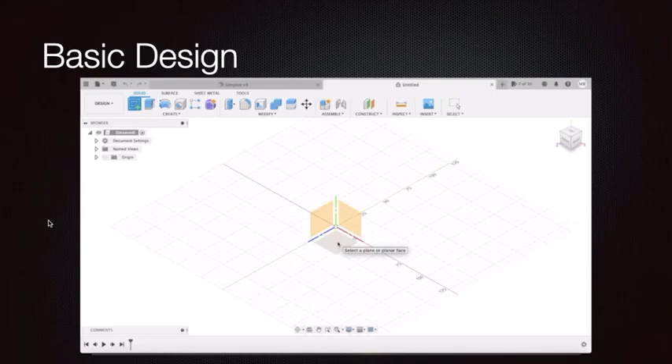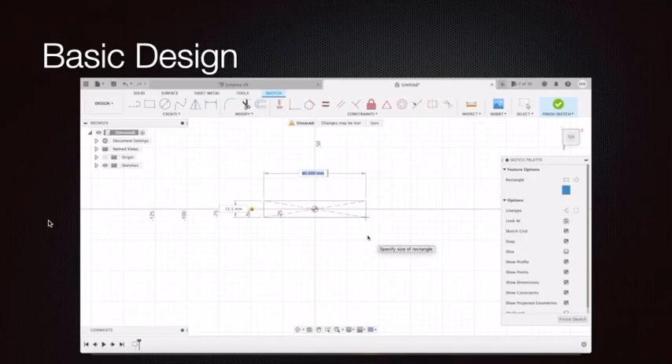First thing we have to do is create a sketch. This is one of the faces of the object, so I'm going to create a sketch on this plane and draw the base of the chassis, which is just a rectangle. I've selected the rectangle tool - in fact I'll select the centered rectangle tool and center it on the origin here of the plane, and make it 13.5 millimeters wide and 28 millimeters long. These are just made up dimensions for this example.

So that's our face. I'm going to click on finish sketch to say I've completed it, and there we are - we have a 2D sketch of a rectangle. Let's just zoom it up a bit so we can see a bit better.

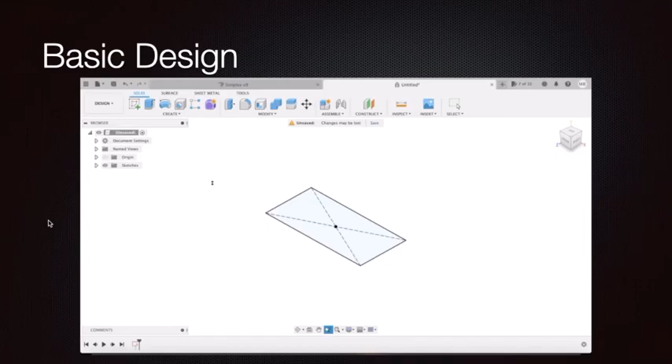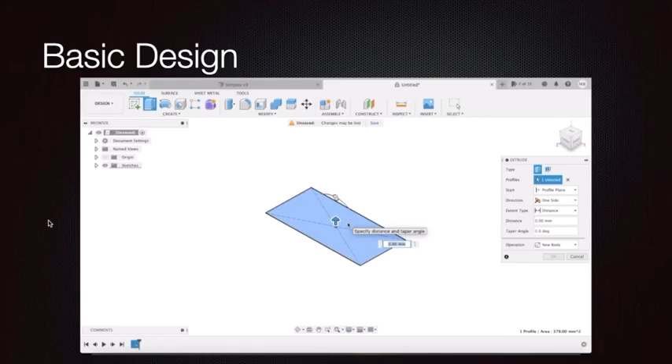Now I'm going to select the extrude tool, and what this does is it effectively pulls out that sketch to create a 3D object from my 2D sketch. I'll select the tool and it's auto selected my sketch because there are no other sketches that can be selected, and I'm just going to type in the dimension this time, 1.5 millimeters. I could use the arrow to pull it, or I can type it in, and there we are. I now have a solid rectangle which is 28 by 13.5 by 1.5 millimeters deep.

By default all the dimensions are in millimeters - you can actually change that if you wish. So let's just have a look around our rectangle, and yeah, we have a nice solid flat plate.

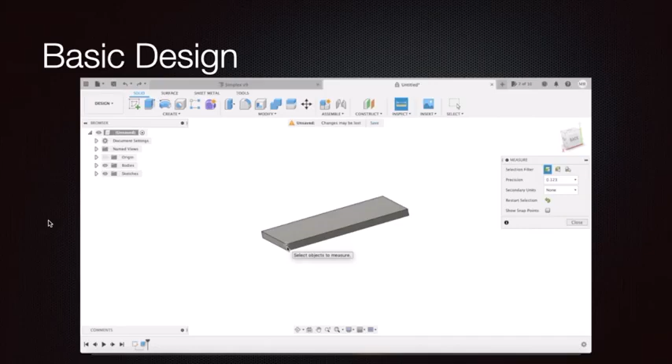What I'm going to do now is use the inspect tool just to show how you might check a dimension. In this case I'm clicking on 2 points and it's saying 28 millimeters, which is not surprising because that's what we put into our sketch.

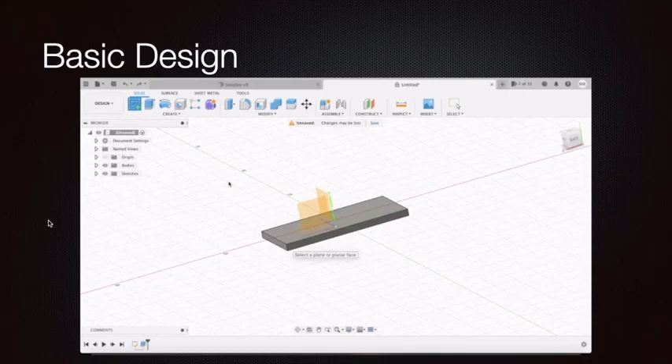Okay, so let's now start adding to this. Let's create another sketch - this time I'm going to create it on this edge of our rectangle. So I click on it. Oops, didn't click, sorry, click again. Click on it, and there we go - we're now in sketch mode.

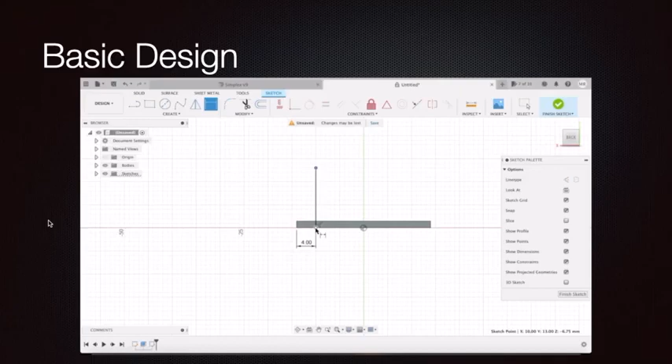What I'm going to do is put in some construction lines that are going to show us where the centers of the axles are. So I'm going to draw a line perpendicular to the base, and set that line to be 4 millimeters in from the edge, using the measurement tool to enforce that. There we go, it's just moved it across, kept it perpendicular. And what I forgot to do was actually set the length of the line, and I want it to be 10 millimeters, so I use this same tool to click on the two edges, pull out the dimension and type in 10 to set the length of the line to 10.

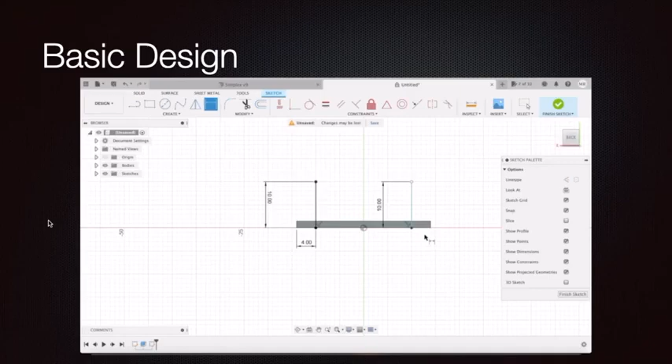So that's got us the first construction line that will show us the center of one axle. I now need to repeat the same thing for the other end, so I'll create another line about there. This time I'll actually set it to be 10 before I finish, saving me having to change it later, and I'll just get this to be 4 millimeters in from the edge as well. And in fact I put it in the right place to start with, so that's good - I don't need to do anything. And now I've got the two centers for the two axles.

So the next thing I'm going to do is draw a couple of circles centered around those points. I'm going to do a centered circle with a specified diameter. Now pull it out - I know the axles are 2 millimeters, the top hat bearings are 2.6 millimeters, and I want some material around the outside, so I'm going to set this to 2.8 millimeters for now. I've pulled out my circle, and I can just type into that box the dimension I want for the diameter, which is 2.6 - sorry, 2.8.

Give us a bit more material. And I'll do the same there, 2.8.

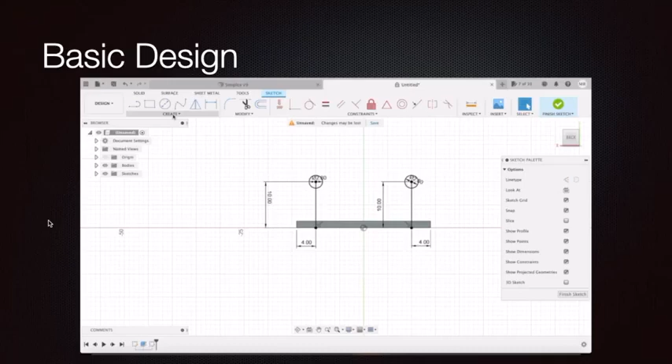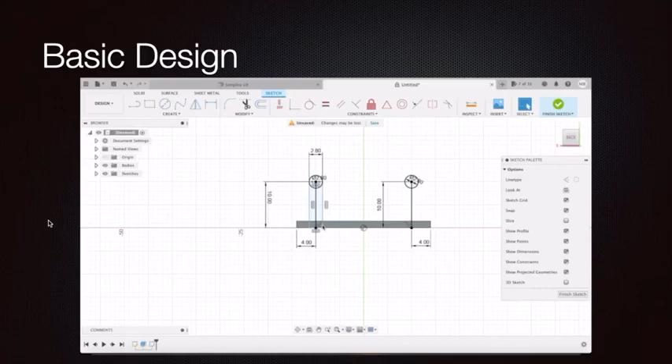Now I'm going to create some rectangles. Select the rectangle tool, which will connect those circles to the base, and pull down into the base. It doesn't really matter where in the base I stop, as long as I'm inside the base, that's fine, so that will do for that dimension. I'll set this one to be 2.8 again, so it's the same width for the rectangle as the diameter of our circle, and I'll repeat the process over here.

Again, it doesn't really matter how far down I go, and you'll see in a second why that's the case. There we go, 2.8. And at this point I'm going to finish the sketch again.

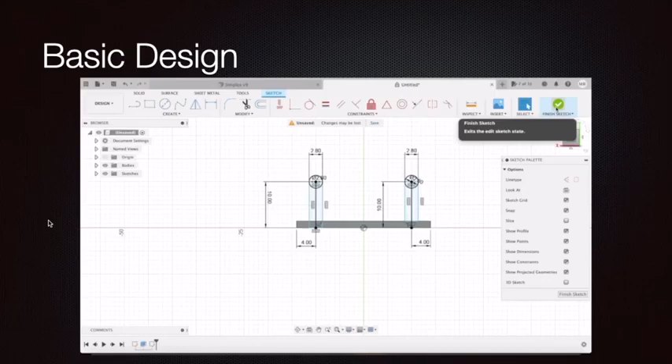There we go, and you can see now we've got our solid base in our sketch. So I'm going to click on extrude. This time it didn't auto select, so there's several things it could select, and I'm going to select each of these areas in our sketch that I want to extrude. You can select any enclosed area to extrude, it doesn't have to be the entire sketch.

I'm using shift click here so that I add to the selection. Now you can see that it's got an arrow that would extrude out towards us, away from the base. In fact, that's not what I want. I want it to go the other way, for 13.5 millimeters, the same dimension as our base.

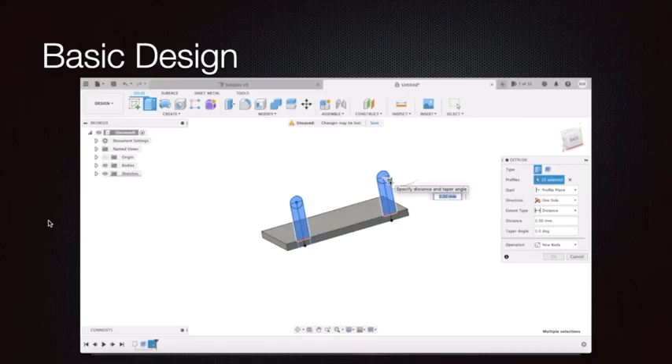So I'm actually going to type minus 13.5 to make it go the other way. I go to the box with the dimension in it, and I start to type minus 13.5. You can see there, it's extruded those shapes out. I've hit return, and that's it. We've now got a shape which is basically our base with some supports for where the axles are going to go.

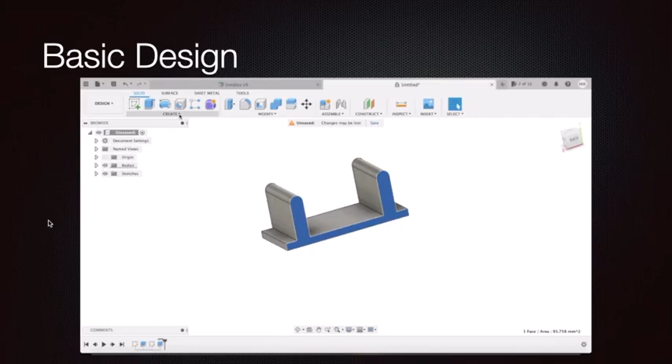So I'm going to create another sketch now, again on this end face. I'm going to create another centered circle with the same center.

This time I'm going to set it a bit bigger, to give us some more meat around where the axles go. I'm thinking 3.6. Actually, I might make that a bit bigger so we get more material there. Let's make that 4 millimeters instead.

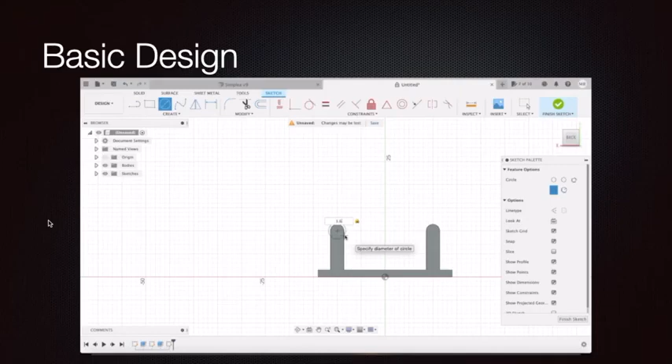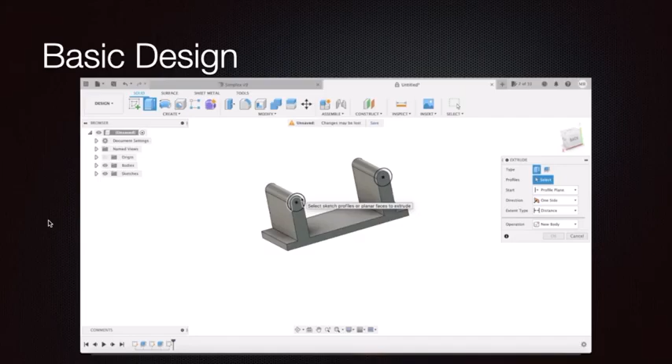I'm going to do the same on the other side, again 4 millimeters, and finish the sketch, then extrude again. This time I'm going to select just that enclosed area, and the same on the other side, and again I want it to extrude the other way, so minus 13.5. You can see now I've effectively put a bigger circle around there, a different looking shape. This is how you start to build up a complex shape.

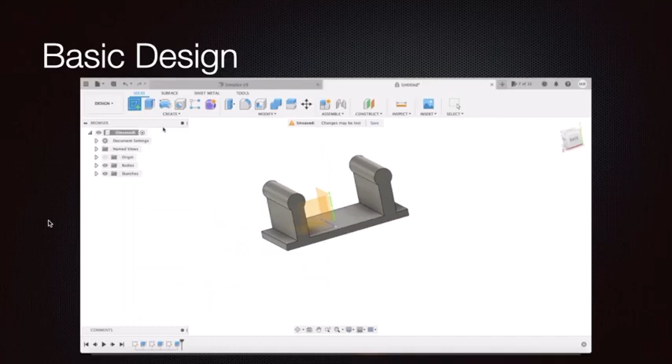So the next thing I'm going to do is I need to be able to put the axles in. I'll create another sketch on that same plane, create another circle. This time it's for the top hat bearings, which are 2.6 as I said earlier, so a 2.6 circle there, and a 2.6 circle there.

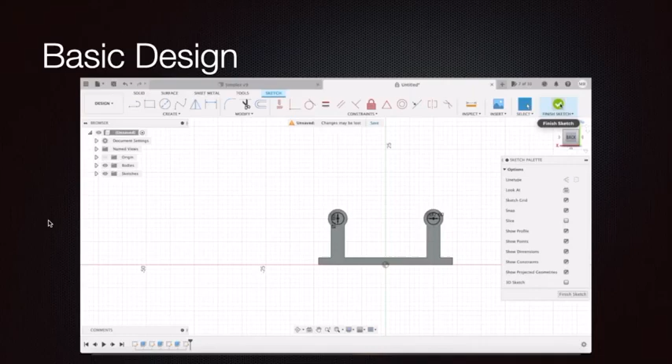Finish the sketch again, then extrude and select the two circles. Again I want to extrude the other way, so I'll type in minus 13.5. But rather than creating a new body, I want to create a hole, so I want the operation to be cut. In fact, it's pre-selected it for me. I hit OK, and now you'll see I've got two holes through those circles I created earlier to hold the bearings, and that's where I'm going to insert the bearings.

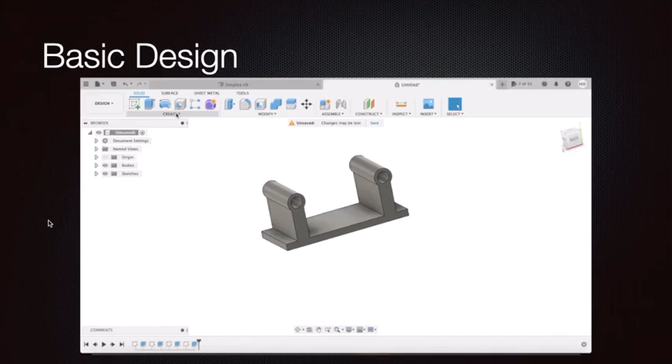So that's the start of my chassis. I'm just going to clean this up slightly, because I don't want the thing to be solid, since I want to be able to put gears and all sorts of things, or pulleys rather, in the center. So let's do a sketch created on the edge, and draw a simple rectangle.

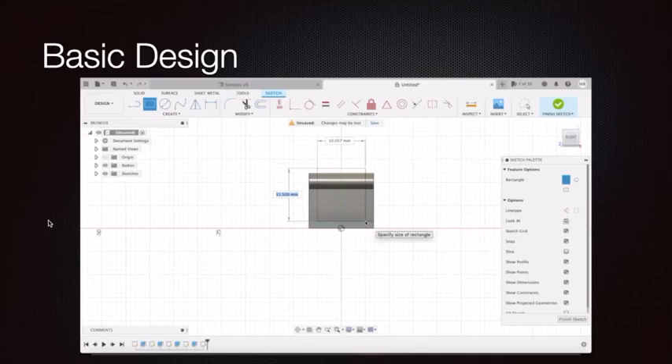Finish the sketch, and then extrude again that rectangle. I'm going to pull it with the arrow rather than type in a number, and I pulled it all the way through, and you can see it's put the operation to cut again. So it's taken away that material, and I've now ended up with my axle supports. Because of the way I drew them originally with the perpendicular lines going straight through, I know the thing is square and that each axle hole on each side will line up, and the distance between the centres of the wheels on both sides are the same as well. So I should end up with something fairly square.

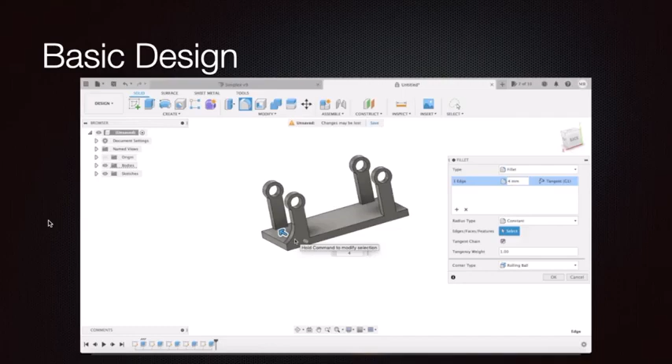So I'm going to now use another tool. I'm selecting the little edge here, and I'm going to select the fillet tool so that I can pull out a fillet to give it some strengthening. I'll just do that again so you can see what I did. Let's turn it around a little bit, select the fillet tool, select that line, pull it out by 4, and you can see I've created a nice smooth curve there, which is just reinforcing that joint. It's a very useful tool, the fillet tool. It'll do lots of things for you, so you can create these fillets like that, and you can create fillets on quite complex shapes.

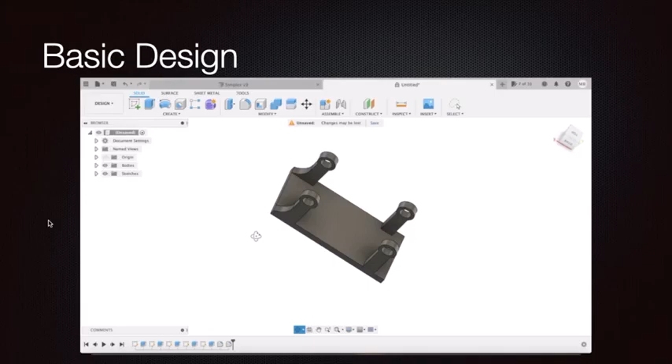Let's do another one. What should we do? Let's do where that circle meets the upright. I'll do it 1.5mm radius fillets. There we go.

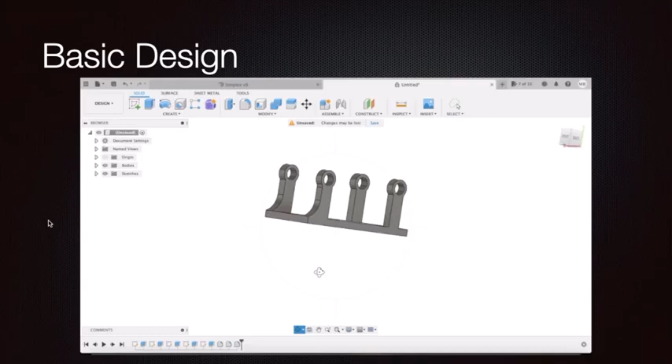And then you can also have fillets intersecting with each other. So if we move this slightly so we can see it, we'll select that line there and pull that one out, and you can see the previous fillet followed out with it, so that you've actually got quite a nice smooth curve in 2 dimensions there.

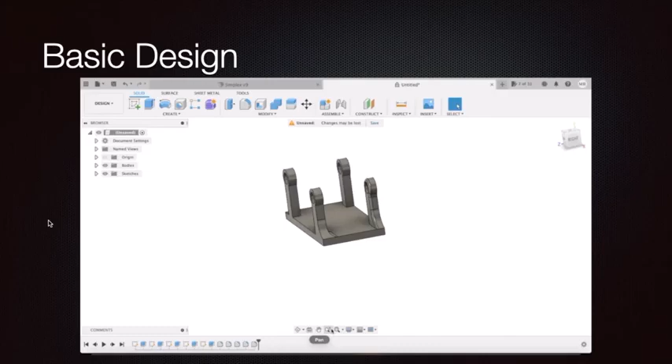You can also use it to go the other way. So if you want to round a corner, let's select this edge here, which as you see is actually quite a complex path, and we're going to move it in by 0.5. Let's zoom that in a bit so we can see better. As I rotate it, you'll see just how it's rounded that quite complex path and put a rounding on it. Useful if you want to take sharp edges off your design.

Well, there we are. Hopefully you'll have seen that you can fairly quickly and easily, with the use of only a few tools in this case - I've drawn circles, rectangles and straight lines, and then used the extrude and the fillet tool, nothing else - create a fairly complex looking shape. You can build up more and more shapes, add more materials, add more shapes, and remove them to create holes. Then those holes can be any shape that you've designed. So hopefully that's given you an idea of what you can do with a CAD tool, and shown you it's not as difficult as it perhaps at first sight appears.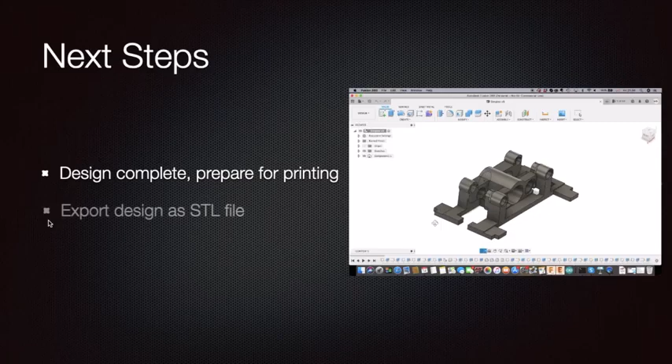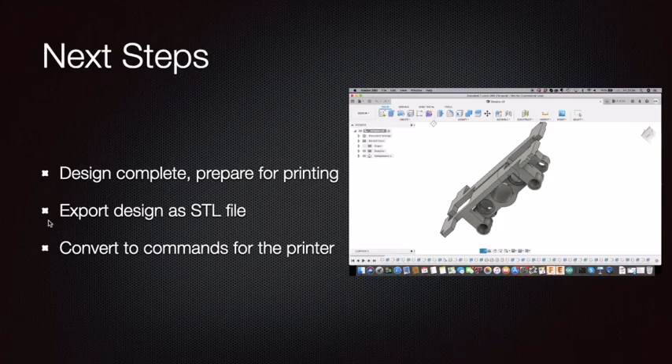The tools that come with printers tend to need these files called STL files, which are a particular format, and you can export it directly from a tool such as Fusion. There's just a file export option, and STL is one of the options that you can export it as. Once we've exported that, we import that file into a program that came with the printer, which converts the CAD design into commands to send to the printer, and that's what we're going to do next.

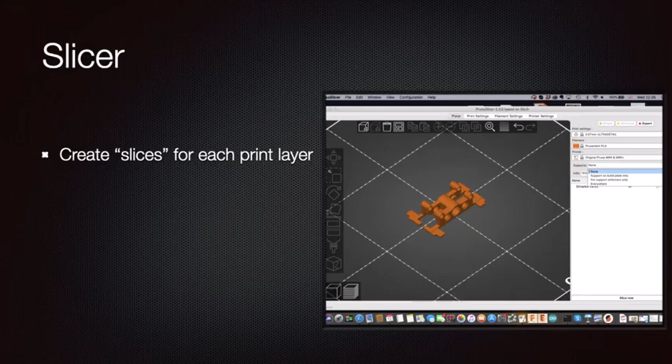The program you import it into is called a slicer. And what does a slicer do? Well, it creates slices of each print layer. So effectively it takes your 3D object and converts it into a number of slices that will be printed one at a time on top of each other by the printer. So here you can see our design loaded into the slicer that comes with my particular printer.

The first thing we'd do is orientate it, so you decide which face you want to put down on the print bed. There are reasons for choosing particular faces. If you've got one face that is much flatter than any of the others, that's always a good one to choose. If you've got one which is much bigger, so it supports the rest of the print, that's a good one to choose.

That brings me on to the next topic, which is support material. This is how you get the print to actually be supported and a solid object, and we'll look at that in detail in a second. You can also control other features such as infill.

When you print something with a 3D printer, you tend not to make it of solid material just because it uses a lot of material. So the way they work is they have almost like a honeycomb center, so that you use less plastic to build it up. It saves on plastic, but it has some downsides. For instance, it can weaken if you have insufficient infill. Although you don't need that much, typically 20% is a lot, 15 is quite common to use. You have solid edges to everything, but you have infill in the middle.

You can also set other parameters about the print. For instance, you can do something called ironing, which uses the hot print nozzle to try and flatten out horizontal surfaces, taking away some of the texture you naturally get when you print with a filament. There are lots of parameters like that, but I'm not going to go into all of those.

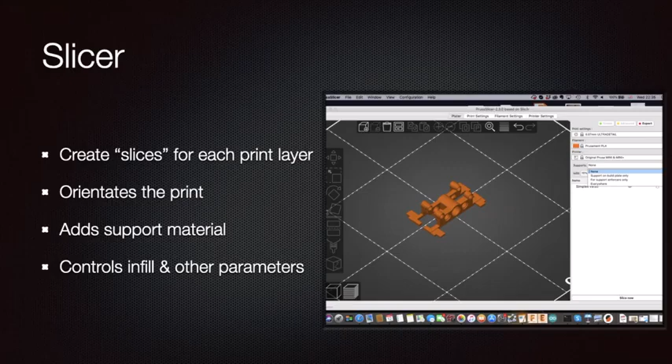Support material, however, is something we really need to understand because it does make a big difference. So what is support material and why do you need it? Normally in a print, each layer is supported by the previous layer, as we're building it up from the print bed, every layer sits on top of another layer. Of course, if you have overhangs in your print, there is no layer below to support it.

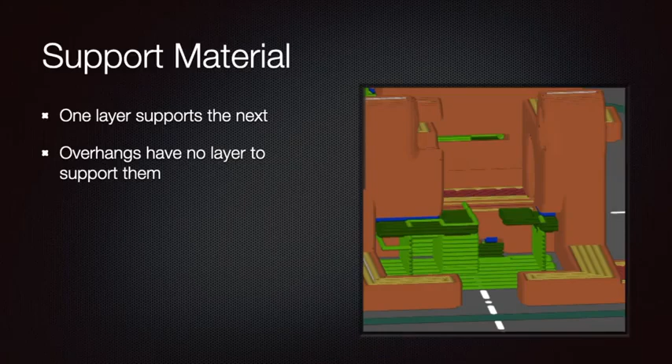So here's part of our design, and you can see we've got overhangs. I'll use my mouse. You can see the pale green material in the horizontal layers is support material for the slightly darker bit, which is the bit that connects to the actual print, and the actual print is shown in this reddish colour. The blue layer bits are something called enforcers, which are to do with where you've got angles in your print.

You can get away with a certain amount of overhang. So if you've only got a very gentle introduction to the overhang, you can find that the previous layer is enough to support it. So if, for instance, you've got one layer of filament that comes out at less than 45 degrees, it will normally get supported on the edge of the previous layer, so you can manage without supports.

The supports themselves aren't completely connected to the prints. On some printers you can have two different types of filament, one used for support and one not, to make the supports easy to remove. On the more hobbyist end of the market, you tend to only have one print head with one type of filament. So the way this is done is where the support layer finishes and the layer of your object starts, you have a very small connection there to make it very easy to remove and clean up afterwards.

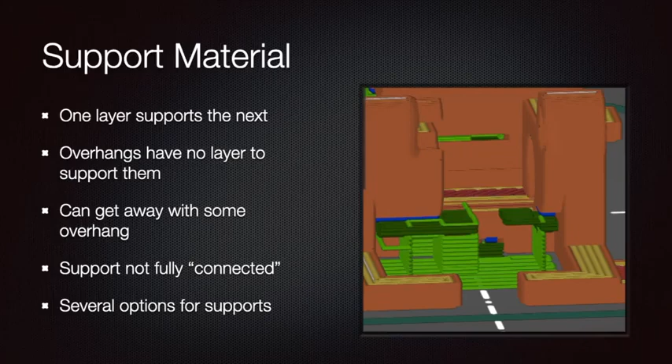There are also different types of supports. You can have supports that grow up from the base of the print bed only, and interior supports. Interior supports tend to be harder to remove just because they are built on top of a layer of your actual print rather than on the top of the build plate. But you do sometimes need to use them depending on your design. If you have big hollows in the middle of your design, for instance, you may need to use internal supports. But it's something you can play around with when you do your print and see how it affects it. Worst case, you end up trying to print something in mid-air and it will just collapse and you'll get a failed print.

Okay, so that's the CAD process and some of the preparation for printing. I think we'll leave it here for part 2, and in part 3 we'll come back and look at the final design for our chassis, for our Simplex, and the finished article itself. Thank you.